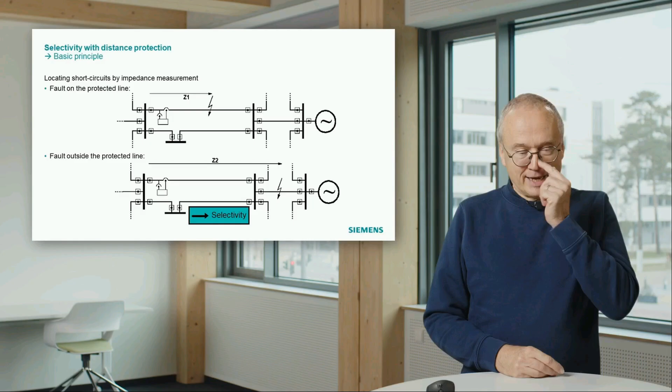This protection relay measures permanently the impedance into the line, and if there is a fault on the line, it measures the impedance of the piece of line from the relay to the fault. That means if it measures this low impedance, it knows there is a fault on the line. If there is a fault on the next line, it will also see this fault, but it will measure an impedance which is a bit higher, and from that comparison of the measured impedance with the impedance of the line, it can decide whether the fault is on the line or not.

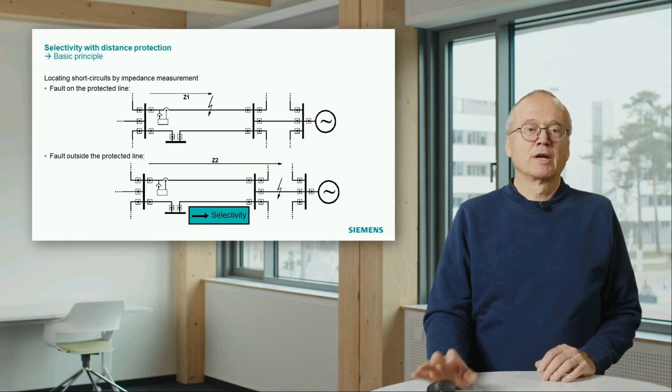That means basically the distance protection principle will lead to selectivity. So from the measurement principle, it is selective, but there is a but, and to understand this but, we have to go a little bit into the details. First of all, I would like to look a little more into this measurement. What does this measurement mean?

As a first approach, I make a very simple replica of the line. I just represent the line by resistance. I know that's not true, but to understand the principle, it's a good way. That means we assume we have a line, and beyond the line we have the rest of a system, which we replace by just an equivalent resistor, in this picture called the load resistor. At the beginning of the line, we measure the voltage and the current and can calculate the impedance. In normal operation, if we measure the voltage and the current and divide the voltage by the current, we measure a pretty high resistance of the line plus the load resistance, which is an equivalent for the rest of the system behind that. It's a pretty high value.

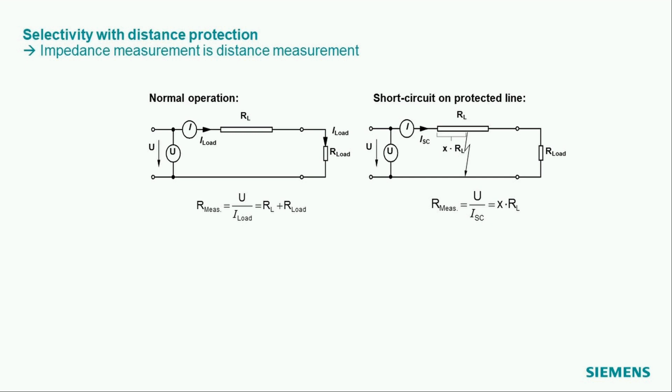If now we have a short circuit on the line, it looks like this. That means we make a short circuit from somewhere on the line to ground. Then we measure a reduced voltage, a high short circuit current, and the result, voltage divided by current, is a percentage X of the line resistance.

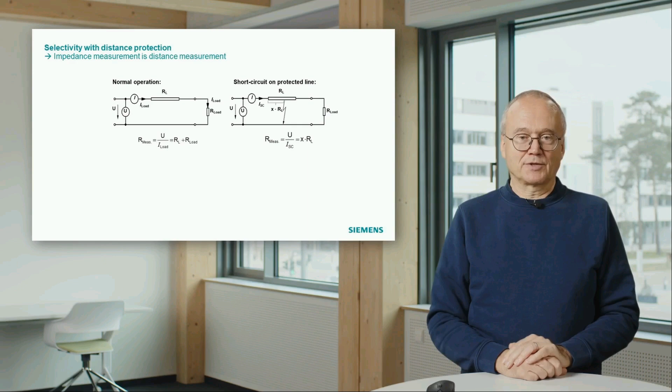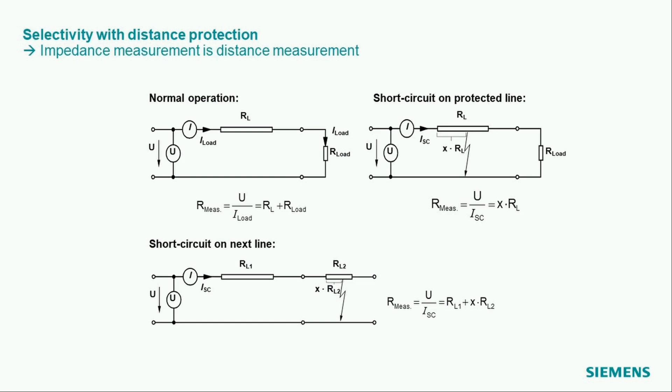And if we have a fault on the next line, a short circuit on the next line, it looks like this. We have a circuit where we measure the resistance of our own line, plus part of the resistance of the next line. That means also a low value, but higher than in the first case where we have a fault on the line. That means if we compare the measured resistance with the known resistance of the line, we could make the decision: is the fault on the line or not.

So in reality it's unfortunately a bit more complex. We have a three-phase system, and impedances are always defined in loops. And if we have three phases, we can define in total 6 loops. We can define the impedance between phase 1 to ground, phase 2 to ground, phase 3 to ground. And we can also measure the impedances between the phases: phase 1 to phase 2, phase 2 to phase 3, and phase 3 to phase 1.

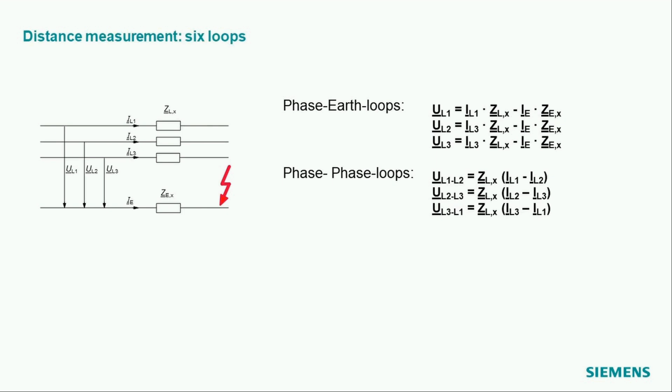That means a normal protection relay has to deal with all these 6 impedances in parallel. That's a bit of workload for the relay, but in most cases we don't have to consider this in the following slides.

Normally modern relays always handle these 6 loops in parallel. You may still have some relays in operation which are called switched relays. In older technologies like electronic relays or electromechanical relays, or also in the early days of digital relays, people were using switched relays, and these relays were only measuring one loop. That means they had to decide in the beginning which loop to measure. But nowadays, you can say all modern relays measure all 6 loops in parallel.

That is one thing we have to take into account. Another thing is we are dealing with AC. That means we cannot talk about resistances. We represent impedances by complex values. That means an impedance consists of a resistive part and a reactive part, and we show that in a diagram where the resistive part is the horizontal axis and the reactive part is the vertical axis. That means the impedance of a line can be represented in this form as this red arrow, just indicating that it has the line resistance RL and the line reactance XL.

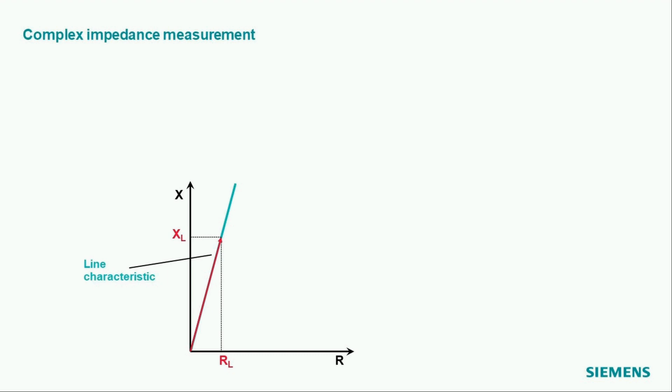And this direction where the arrow is, is on the so-called line characteristic. The angle of this line characteristic is, for overhead lines, in this area as shown in the diagram. You can say 80 degrees, 85 degrees, or for extra high voltage even a bit higher. For cables it's a bit more flat. That means there the resistive part is higher.

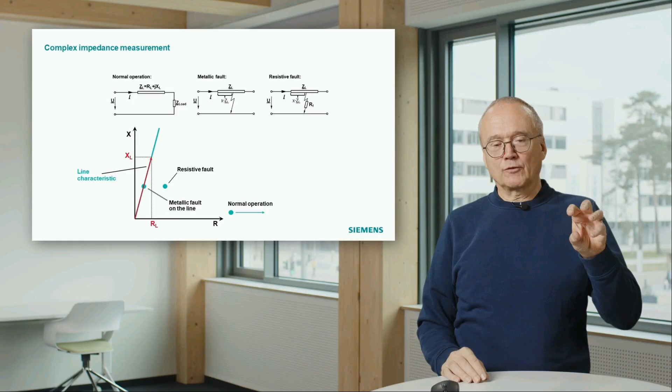And if you have a fault with a fault resistance, that is a thing which also can happen. If you have a phase to ground fault somewhere on the tower, we have a lightning arc with a fault resistance, we have a tower resistance, then you move out to the right. That means fault without fault resistance is on a certain location on the red arrow. If you have fault resistance, you move to the right, the bigger the fault resistance is.

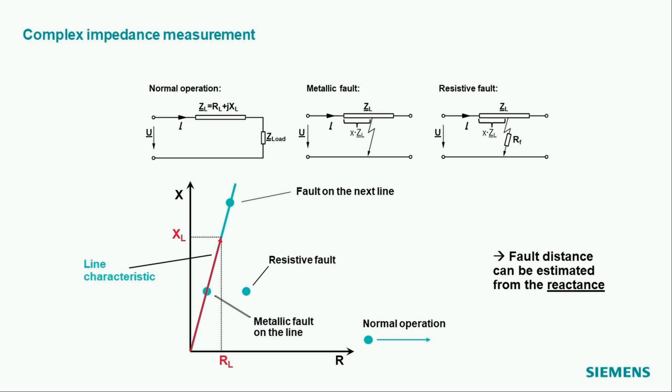And if you have a fault on the next line, you are somewhere there. That means as a result of this discussion, we don't want to draw nice diagrams. What we want to do is make the decision: is the fault on our line or not?

And what can we take? We see the resistive part of the measured impedance is influenced by the fault resistance, and it can be anything - zero, or a high fault resistance. But the reactance is not influenced. That means we can take the measured reactance to the fault as a criterion for whether the fault is on our line or not. The fault distance can be estimated from the measured reactance. We measure the complex impedance, split it into resistive and reactive parts, and use the reactance as a criterion for where the fault is. We compare that with the reactance of the line, and if it is lower than the reactance of the line, we know the fault is on the line.

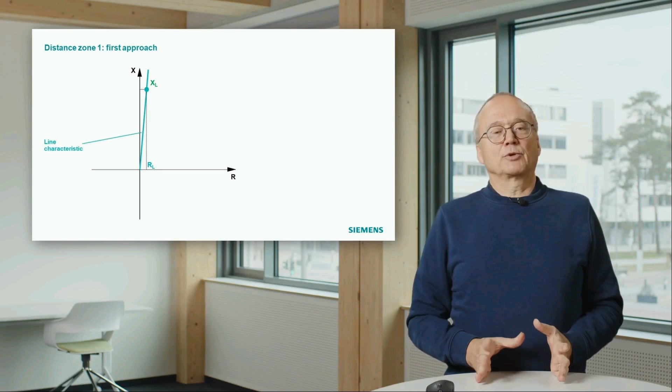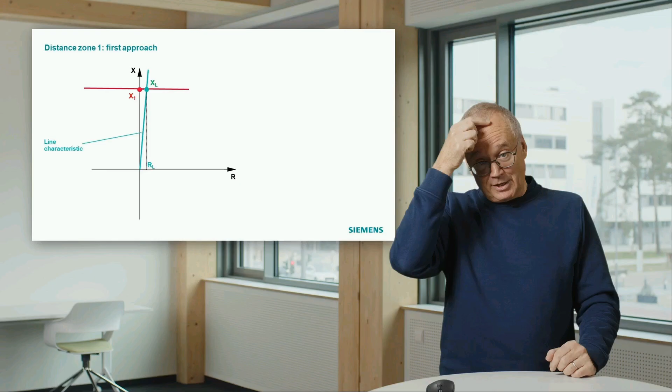And that is the idea of the first zone of a distance protection relay. We take this complex plane and define a certain area in it, and if we detect a fault in this area, we say the fault is on the line. In the first step, the upper limit is the line reactance. That means if we want to set a distance relay, we ask our network planning people what is the total reactance of our line, and that is our horizontal limit.

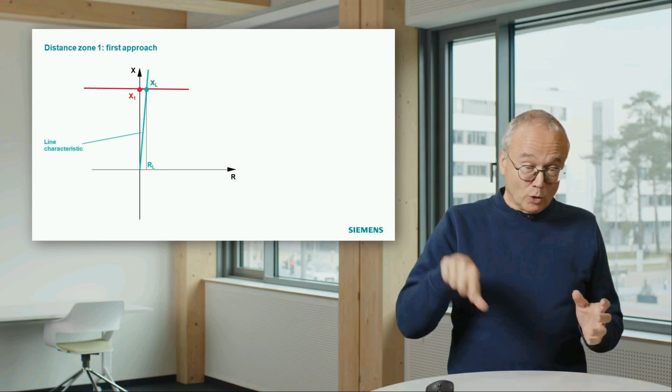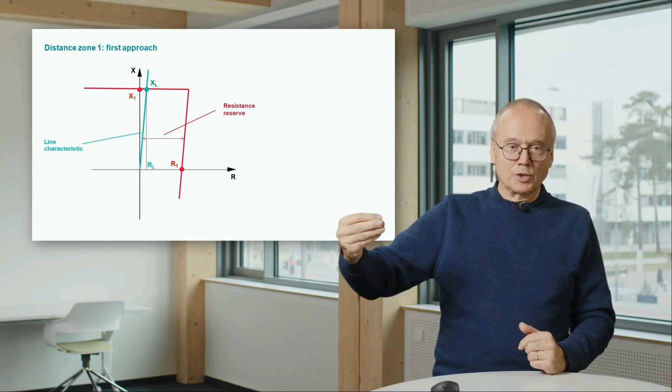Then, in order to have a complete area, we must also define a limitation on the right side. That is a bit tricky, because we must decide what amount of fault resistance we want to catch. If we make this pretty narrow, with a significant fault resistance we would measure something outside the zone and not trip. If we make it very big, we risk that with increasing load flow we move into the diagram. We must be careful that the right side doesn't go too far - otherwise we'd be very sensitive and able to catch high resistive faults, but in a strong load situation the measured point would move in and we would trip on load, which is not good. This resistance reserve setting is always a discussion, and we'll talk more about that at the end of this video.

Then to make this area complete, normally we would limit it to the first quadrant, though for some reasons it's normally widened up a bit. The first zone looks like this - our setting. We make a reactive setting of 100% of the line reactance, and the resistive setting is calculated from the expected fault resistance. If we measure an impedance inside this characteristic, we would trip.

So the question is, will that work? It looks nice and selective - as soon as the short circuit is a little bit beyond this XL on the next line, it will not trip. The question is, does that work? And you can imagine if I ask the question like that, the answer is no, it does not work.

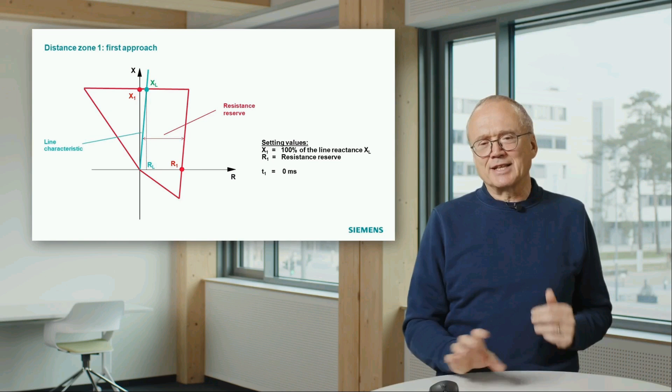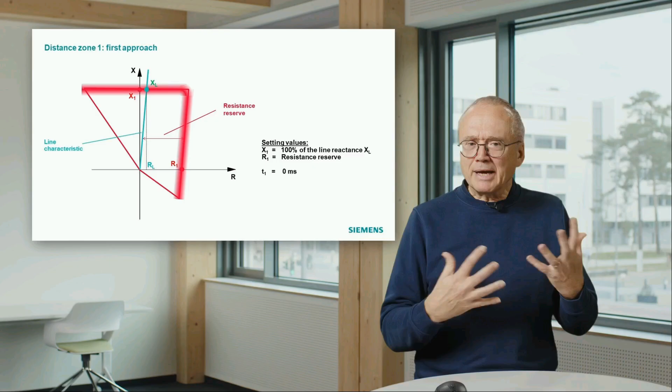And the result of this discussion is that this horizontal line is not really a sharp line - it looks more or less like this. Depending on the direction of the measurement error, it can be a bit higher or a bit lower, and the same applies to the right limitation.

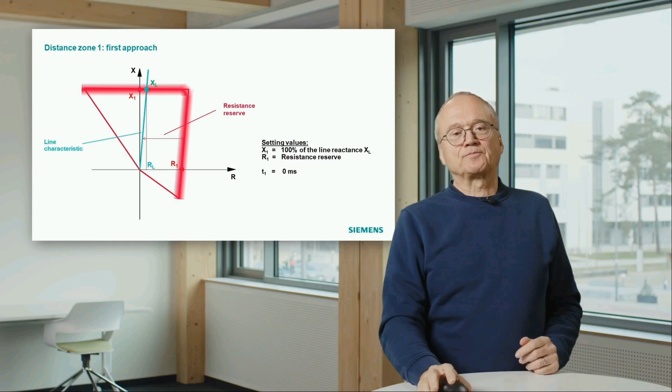And what is the result of that? If you have a fault just beyond your line, at the beginning of the next line, it can be seen inside the characteristic with our setting because of these measurement errors. Or the result can also be, if you have a fault just on the line but pretty near the end, the relay measurement says it's outside - I don't see it in the zone. That is a principal problem in distance protection, that you have to live with this unsharp limitation, and one thing which bothers people most in this context is that you may cause wrong trips.

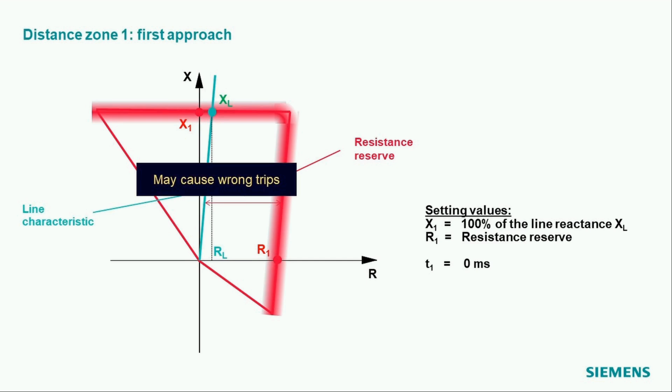Because a short circuit on the very beginning of the next line may be seen inside the zone with these settings, that means this approach of making the horizontal limit to 100% of the line reactance doesn't work. It may lead to wrong trips, and that is why it is normally not used.

So what can you do as an alternative? We start with the same thing. We have here our line characteristic, consisting of the reactive part XL and the resistive part RL. And now we make our limit a bit deeper, a bit lower, to avoid these wrong trips.

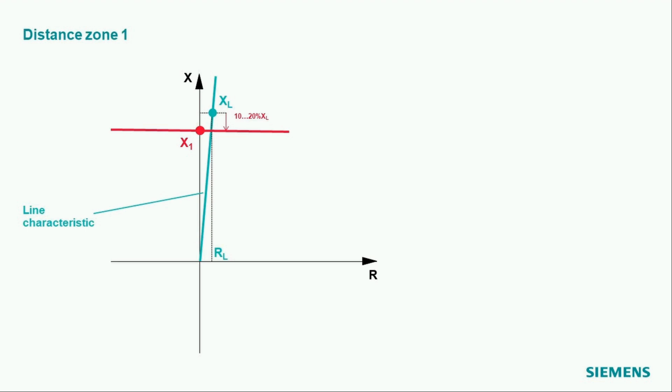What you typically do to cover possible measurement errors is making it some 10 to 20% lower. That means you make a setting of this horizontal limit not to 100% of the line reactance, but for instance to 85% of the line reactance.

Then the same story, right limitation for the fault resistance, and to make this area complete also that limitation. That means we have a setting that the X value is 80 to 90% of the line reactance. And that is a standard value which is normally applied in distance protection.

That avoids wrong tripping with faults on the next line, even with measurement errors. But of course it has a disadvantage. The disadvantage is, you can imagine here, at the end of the line, if we say okay, we have no measurement errors, at the end of the line you have a certain part of the line where a short circuit will not be seen in the first zone. But at least you avoid wrong trips, and that is the important thing.

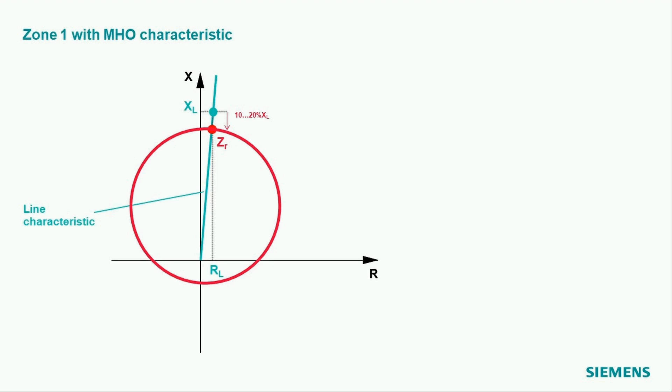And for that reason, we also have the option, instead of using this polygonal characteristic, to use so-called MHO characteristic. The idea behind that is the same. You have this circular characteristic. The setting principle is also the same.

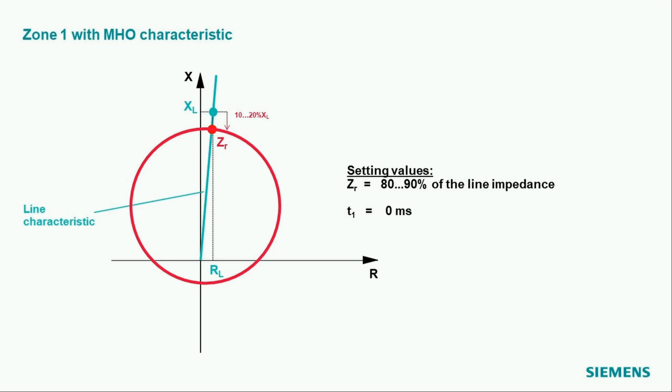That means this circle is also a bit an unsharp thing due to measurement errors, because you have to deal with the same measurement errors. And that means you also have to do this reduced setting of 80 or 85%, and you make then a timer setting. That means all the other ideas I would like to discuss later on are also applicable if we have this type of characteristic.

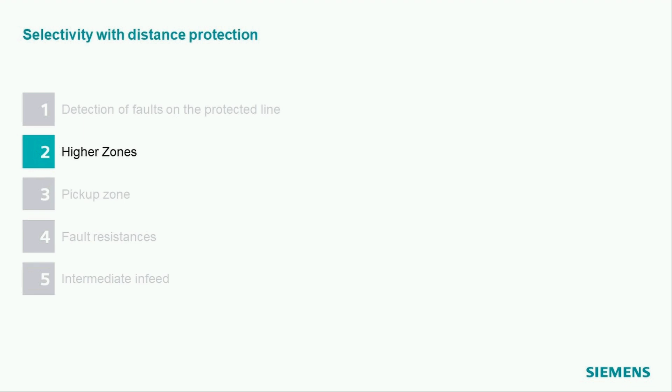Now let's look into higher zones. Up to now we discussed zone 1. Zone 1 reacts on most faults of the line, but we must have in mind there is a certain part at the end of the line which are not seen in the first zone, depending on the measurement errors. And that's one reason why we have higher zones.

And if you look into a manual of a distance relay, you will see many zones. So you might ask your question, why do distance relays have more zones? One possible answer would be to react on faults at the end of the protected line. That is a thing I already discussed. Another option: it could be a backup for the next line. The reason could be we want to confuse the protection engineer.

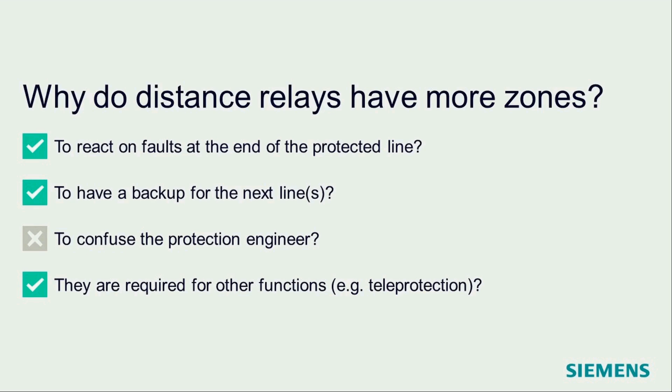Or a last thing, these things are required for other functions like teleprotection, auto reclose, and whatever. And you can imagine I have 4 options here. 3 of them are valid and 1 is not valid, but I also would like to say a few words on that. We will discuss a bit more in detail how to use higher zones to react on faults at the end of the line. We will also discuss the backup situation.

But what about: are they used to confuse the protection engineer? Some people sometimes have the impression, and I had many discussions on the number of parameters and setting values and functions we have in the protection relays. Yes, protection relays, or the distance protection function, is a complicated function. Just based on the principle, you need a lot of parameters to do that properly.

And then you have worldwide a lot of flavors and different special applications which sometimes need an additional timer here, an additional corner in the characteristic there. And that makes the thing complicated, and all protection manufacturers have to make up their mind how can you deal with the amount of parameters. And additionally, we must also have in mind we have a lot of integrated functions in a modern protection relay, and that makes it complicated. And of course, we had to think a lot about that. We had a lot of discussions about how can we make it easier for the user.

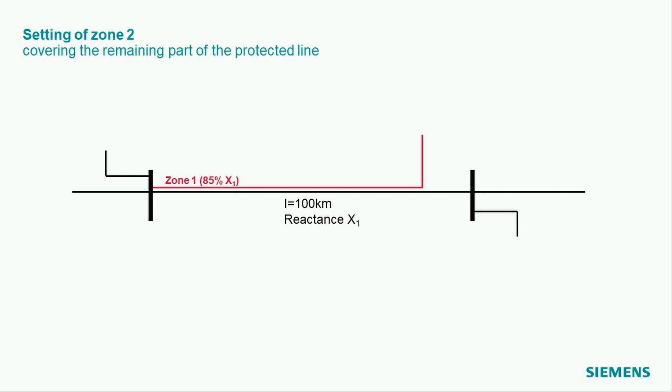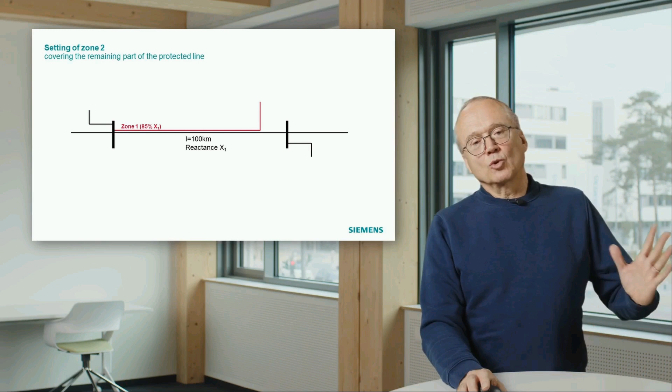Remember, if we forget about measurement errors and assume we have none, the first zone of the left relay would cover 85% of the line. The same applies to the relay on the right side, it would also cover 85%. That means on both sides we have this remaining 15%, exactly 15% if we have no measurement errors. It can be more or less than that.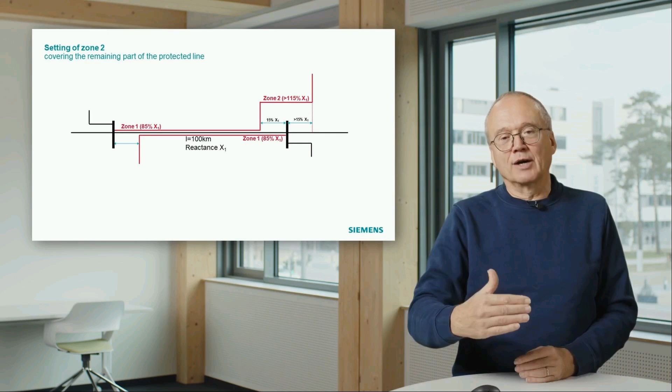So what we can do is compensate for this problem. We add a zone 2, which is just a second zone that looks a bit wider into the line. That should be wide enough so that we are sure the remaining 15% are covered, even if we have measurement errors. That means it must be at least 15% beyond the end of the line.

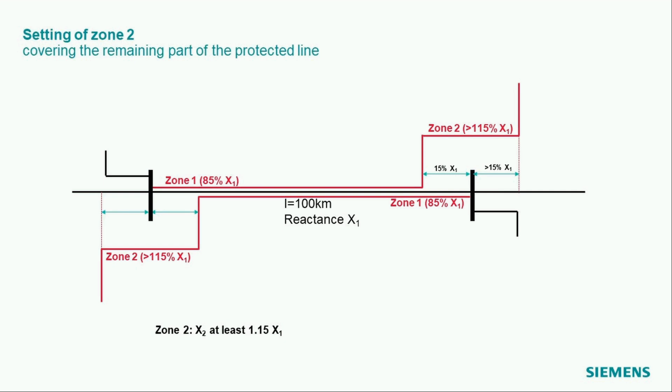If we do that from both sides, if there is a fault in this remaining 15%, it will definitely be tripped also from the left side, unfortunately with a little delay, but it will be tripped. That is one purpose of zone 2: delayed trip. In extra high voltage, delayed trip is not acceptable, so you have to do more things to bring this time down. That is where teleprotection comes in, but that's a different topic. So here we are at least sure we see this fault in zone 2 and will trip on that. That was the purpose, to cover the remaining 15%.

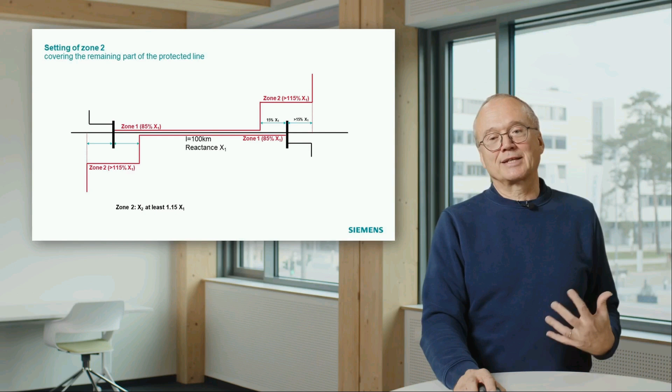But we also have to think about the backup. Remember, we always have to make up our mind: if we have a fault somewhere and the relay which should trip does not trip, what is going to happen? Distance protection has the nice feature that the remote backup is always there, and I can show that in this example.

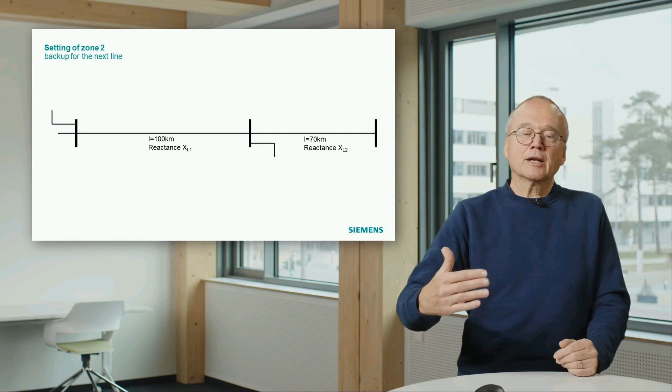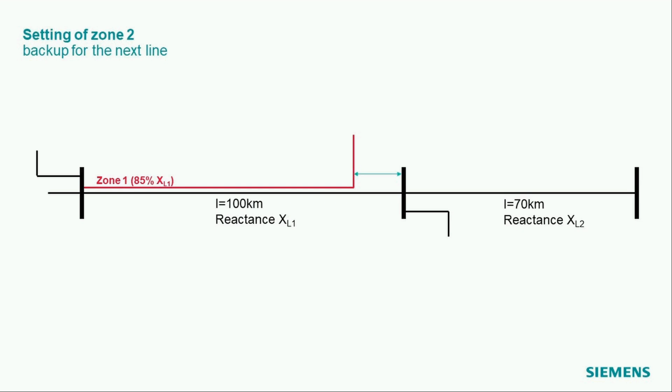We again have our 100 kilometer line, and now I also look into the next line, which is a 70 kilometer line in this case. On the 100 kilometer line, that is the first zone, 85%. The same is also there on the right line, on the 70 kilometer line, also there we make a setting of 85%. Now we look at zone 2.

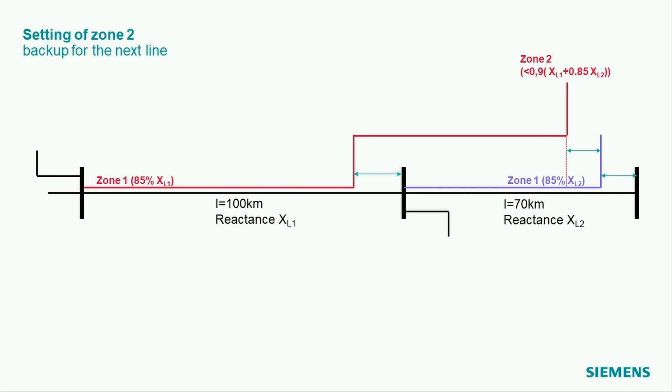If we remember the setting described on the previous slide, it looks a little bit into the following line. That means, with no measurement errors, it would already be a backup for the first 15% of the 70 kilometer line. And at that point you could have the idea: why don't we extend zone 2? Let's make zone 2 longer, then we have backup for a higher part of the line. That is what you normally do with zone 2: make it long enough so that it covers as much as possible of the next line as a backup.

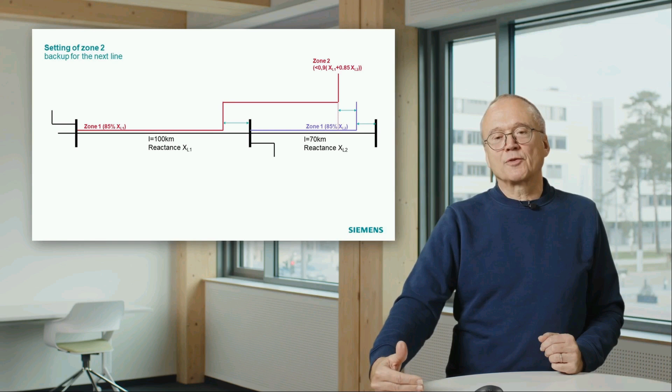Also there you must be careful. You must keep a certain distance to the end of zone 1 of this line, as indicated on the right hand side, otherwise you will get conflicts with selectivity. But at least with that you can do a backup of a significant percentage of that line.

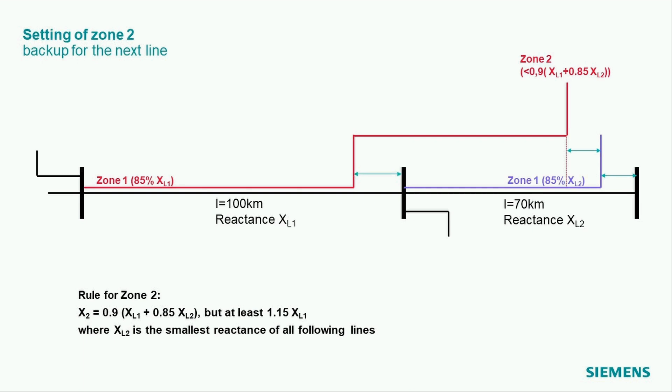That means the rule for zone 2 is, as indicated here: at least 15% higher than the reactance of the line, and it must keep a certain distance from the end of zone 1 of the next line. The problem, which is not visible in this slide unfortunately, is that in a meshed system you often have not only one next line, there can be several lines there.

And there you have to take the next line with the smallest impedance or reactance. You can imagine, if you want to do that calculation for a bigger system, doing that by hand is a bit tricky.

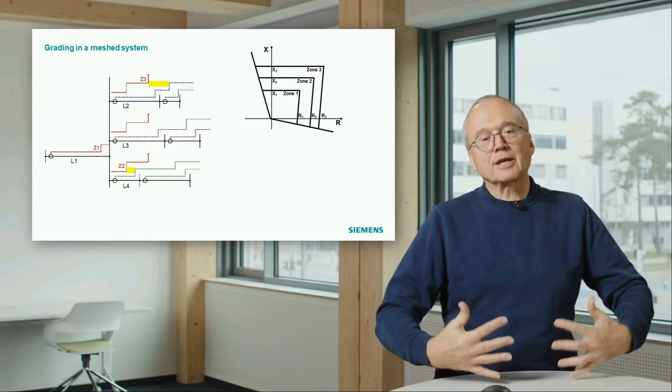This can be continued not only to zone 2, you can also define a zone 3 and whatever you need in your application. There are different numbers of zones in use. So you end up in such a diagram.

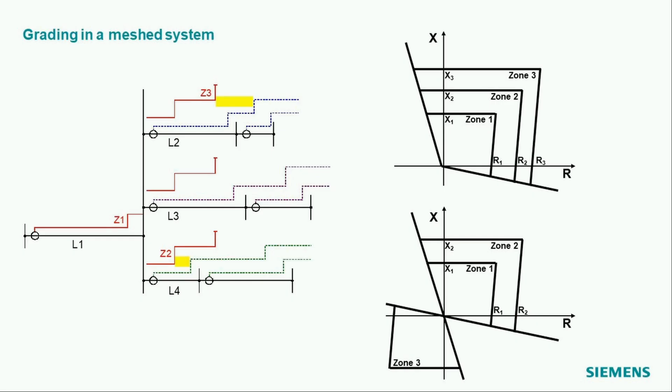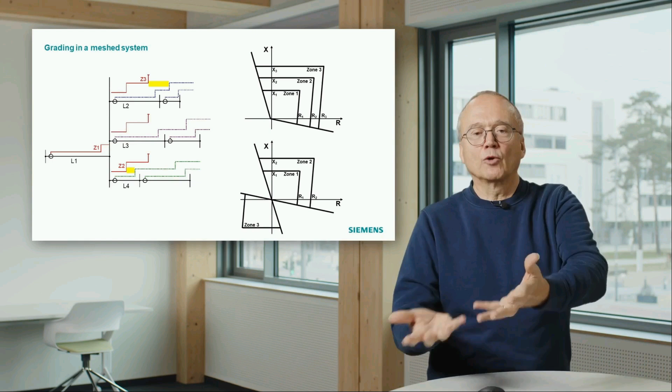Sometimes you also have applications where, for any special reason, you want to look a little bit reverse. Instead of looking only forward into your line, you make one zone which looks reverse. That is typically also a backup application. So in addition to the zone size, you also have a parameter defining whether a zone looks in a forward direction or a reverse direction.

If you look into a manual of a protection relay, you often find in the description a so-called pickup zone. What is that? Actually, the pickup zone is the outer zone, meaning, depending on how many zones you have, it's the biggest zone. In some relays it has a different name; sometimes it's really called pickup zone, but sometimes it's just the outer zone.

This pickup zone requires particular attention, because you must be careful to define its size. This pickup zone defines two things. You should be aware that with heavy load, the measured impedance is approaching your characteristic, and if you are in a critical situation, you suddenly may move into the characteristic and then you will trip.

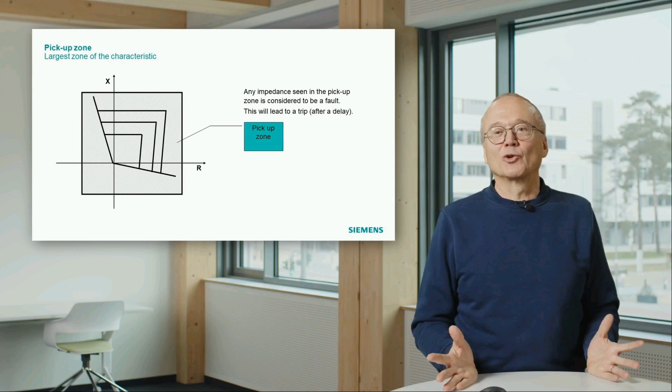You normally have delay times, so all zones have delay times. The pickup zone typically has the highest delay time, so it may have a delay time of a second. But if it moves in a second, the control center is not able to react on that - you will trip. That means if you define your pickup zone, you must be pretty sure that you don't run into the pickup zone in normal operation.

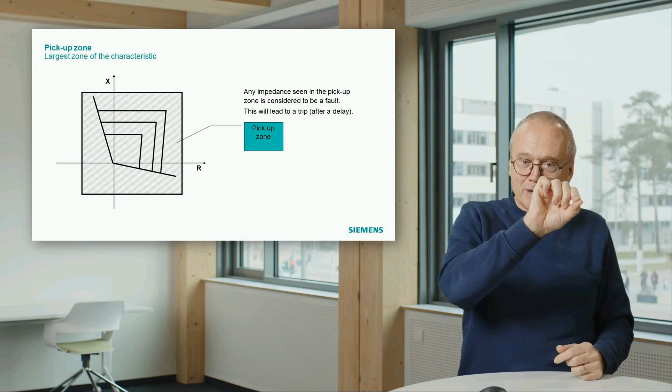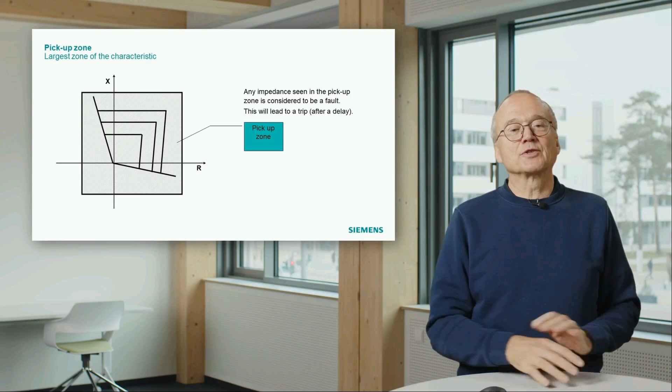That means make it small. The other thing is you can only detect faults inside the pickup zone. If a fault has a fault resistance, remember it moves to the right, in that direction. That means if you make your pickup zone too small, you have the risk that you don't see some faults - you may have resistive faults that you don't see. And that makes the setting of the pickup zone a bit critical.

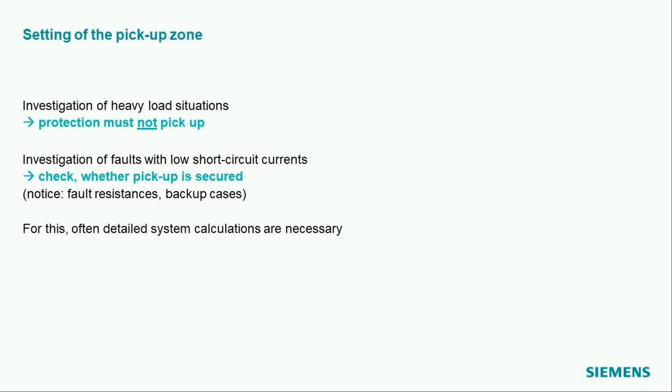You must investigate heavy load situations, and you must make the zone small enough that the protection does not pick up. A critical heavy load situation is, for instance, when you have a heavy load transfer from one area of the system to another, meaning the lines connecting these two parts are heavily loaded. And now you have a thunderstorm and one line has a short circuit - it trips.

In case of a short circuit, we have to trip the line. What's now going to happen? The other lines connecting these two parts of the system have to take over, because one line is shortly out of service due to the trip. That means they are overloaded for a short time. And if at that moment you run by this overload into the characteristic and you trip, you lose even one more line, and then you end up in a cascading outage.

That may end up in a blackout situation. So this is something where you really have to do investigations - you have to find out all critical situations which may occur, not only today but also in future, because you want to define the settings now and they should also be valid in a couple of years. The other thing you have to investigate is faults with low short circuit currents, meaning you have to take into account fault resistances, and you also have to take into account backup cases. There too, detailed calculations are necessary.

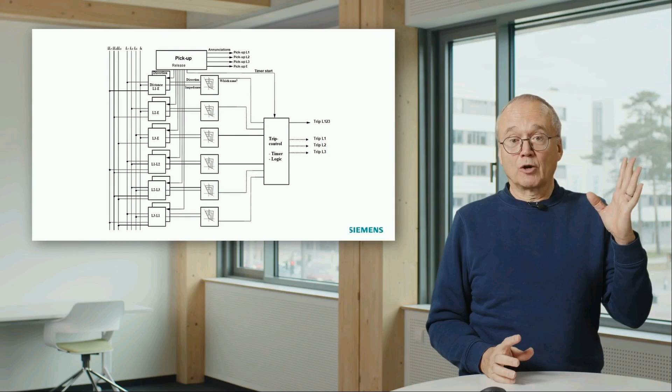And what you also see here is we have 2 different options for a trip. The standard thing is if we trip all 3 poles of a breaker. But remember, in overhead lines we often have auto reclose active, and in auto reclose we have in many applications the concept of single pole auto reclose. That means we don't give a trip command for all 3 poles of the breaker. We see what type of fault we have, phase to ground fault, and then you give a trip

command only to that phase of the breaker. That means protection relays which are able to do single pole auto reclose have, in addition to the 3-pole trip, also single pole trip commands.

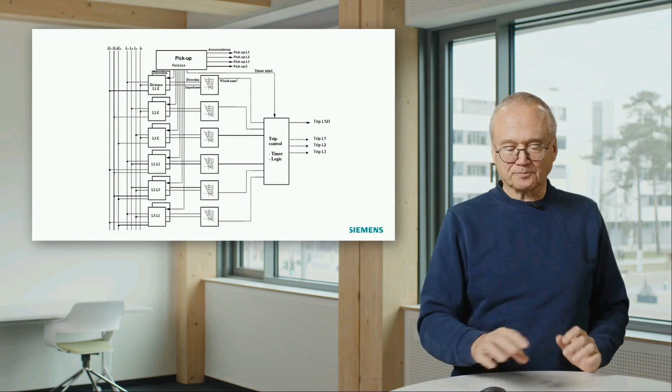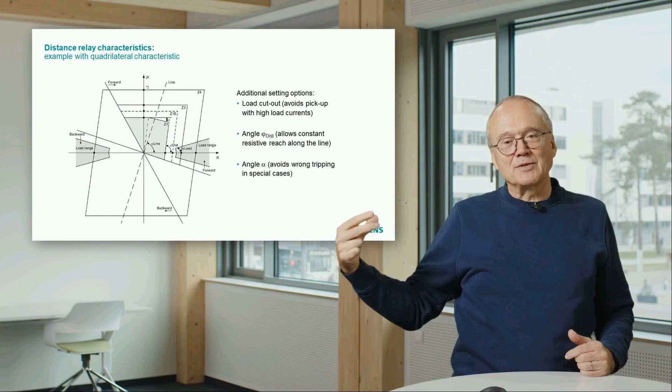And what is also visible here is these load cutouts on both sides, shaded here in gray. These load cutouts have been designed to allow, on one hand, that the load point or the measured impedance can move somehow into the characteristic, can approach the characteristic. That means in that area where the load typically is around the resistive axis, we cut out a little bit of the characteristic. That means if the measured point approaches the characteristic, moves in, but still within this gray area, then we will not pick up.

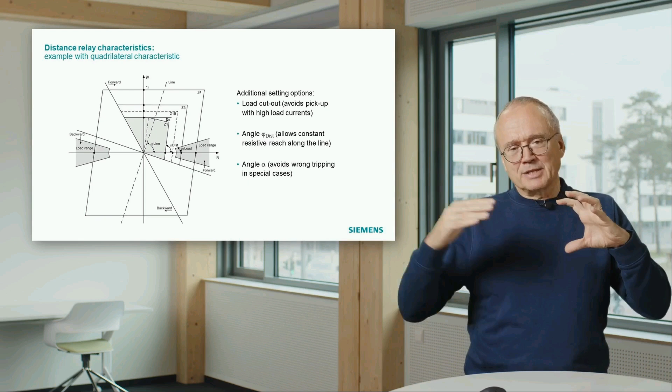That's called load cutout. But on the other hand, if we have a short circuit and we are somewhere in the upper right corner of the relay, we can still react on that. This conflict between shrinking the pickup zone to avoid load problems, and making it big to catch all the faults, can be solved a little bit by making this load cutout. Of course, you have a couple more parameters used to define this load cutout, which are not used in all applications. And the same is also possible for the Mho circle - there we also offer the possibility to make such a load cutout.

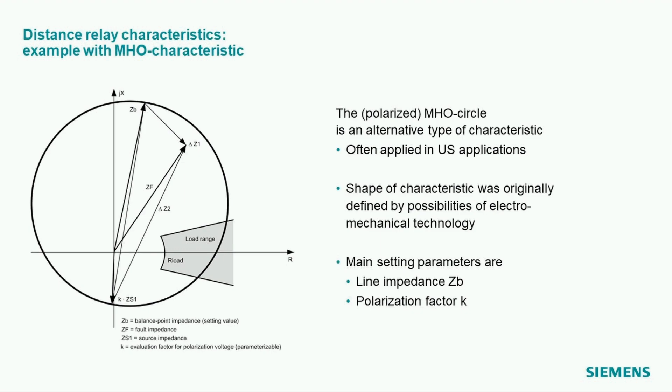So in the final part I would like to talk a bit about fault resistances, because dealing with fault resistance is unfortunately a topic you are often facing if you deal with distance protection. Because if you do the zone settings, you have to think about fault resistances, and for that reason it makes sense to look at that a little bit more in detail.

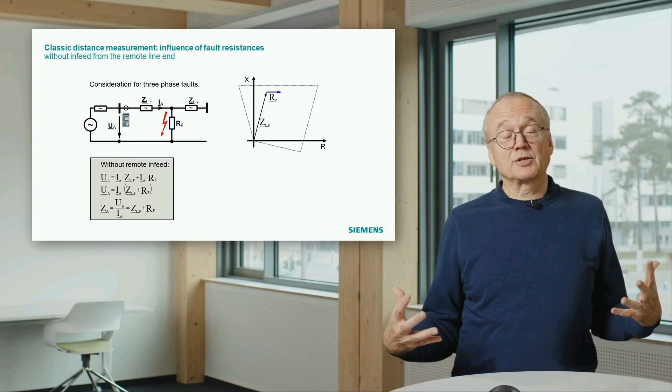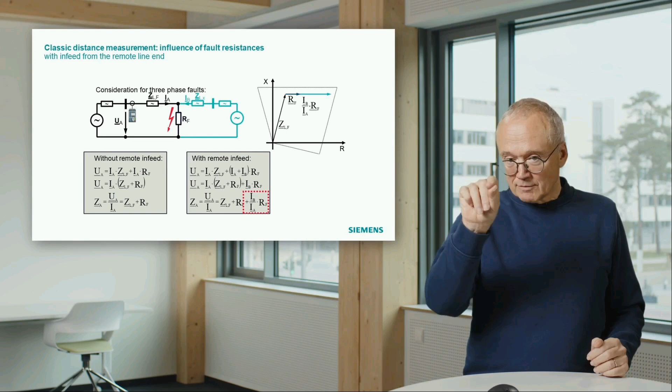And that is how a normal distance algorithm reacts. That means if we are in a meshed system where current comes from both sides, and we measure - for instance a setting of 20 ohms, and we have a fault resistance of 10 ohms - we can even, based on this effect, move out of the characteristic. That is a thing which has to be taken into account in the settings. If you look into the setting recommendations in our manuals, you will find a strange formula where you need the current from the other side. That is the reason behind that.

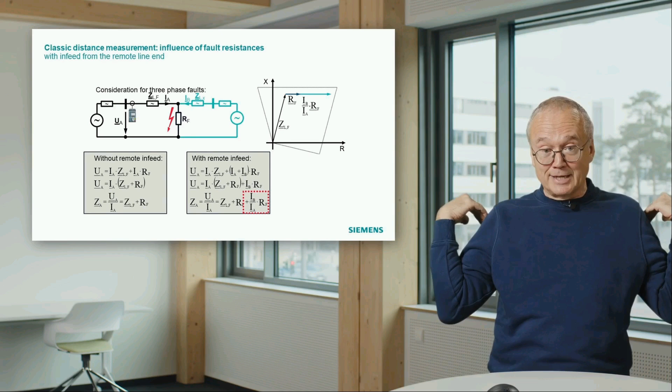And what you can also see from this simple calculation is what is the worst case. The worst case is if this ratio IB over IA becomes pretty high, and that is a situation where the majority of the short circuit current comes from the other side. That means if our left protection relay has a weak infeed behind it and you have a strong infeed on the other side, then this ratio becomes pretty high, and then you may move out of the characteristic.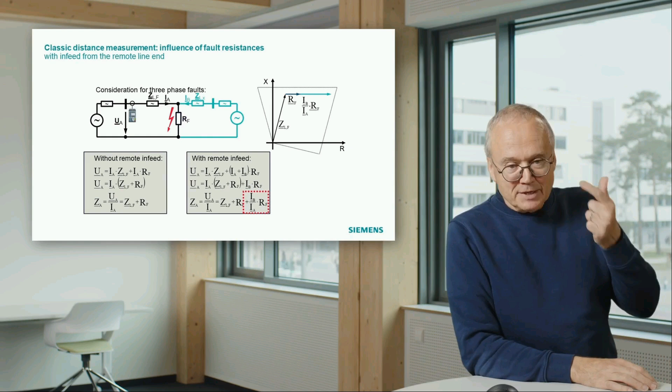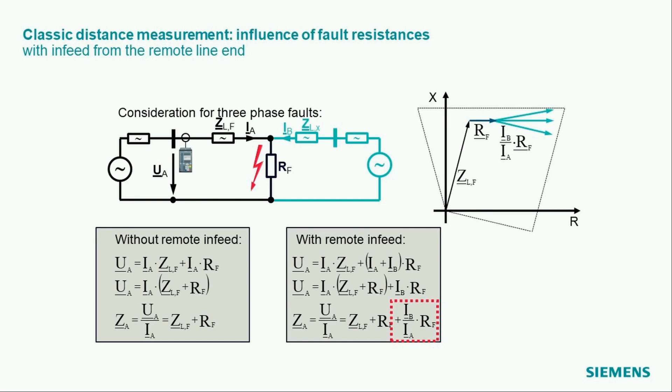And that's only one part of the story - it goes even further. These quantities here are complex quantities, meaning the ratio can become complex if the phase angles of the currents from both sides are different. If this ratio becomes complex, you do not only have to add a horizontal error, it can turn the whole thing a little bit. That means if you are close to the limit, you can even go up here and leave the characteristic over there. So for that reason, that has to be taken into account, and we can discuss this a little bit more using my simulation.

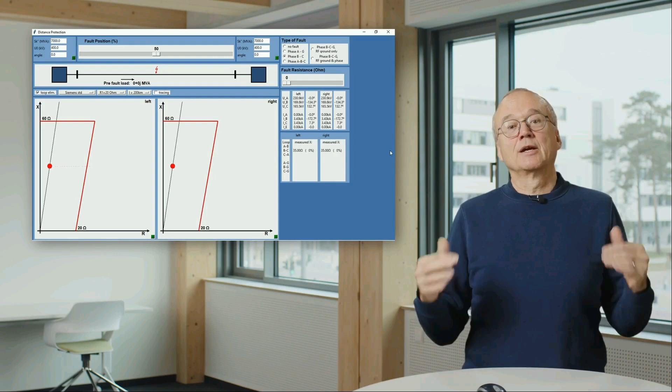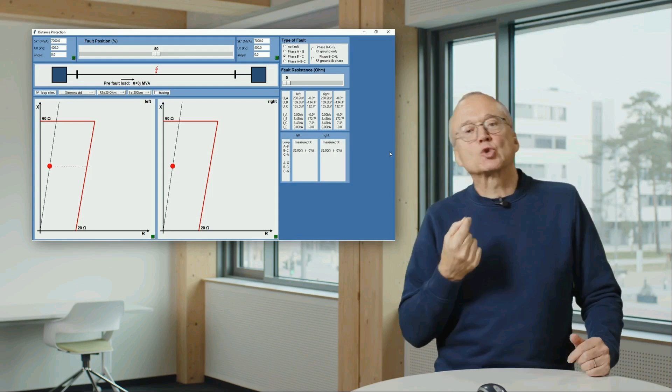We have the same short circuit current from both sides. That means this ratio IB over IA I showed on my slides is 1. And that means the impedance we measure is the impedance of the piece of line, 50% of the line, plus fault resistance, plus IB over IA multiplied by fault resistance, which is 1. That means we measure 2 times the fault resistance. And we can see that here as a result.

We move now much faster to the end. That means already with 10 ohms, we are now reaching the limit. We have a setting of 20 ohms and we are approaching the limit already with 10 ohms due to the short circuit current coming from the other side.

But, and that is the good thing, we still move horizontally. You can show that a little bit better by activating this tracing. So you see here, with increasing fault resistance, the reactance measurement is not influenced. That means we just have to look at the reactance limit.

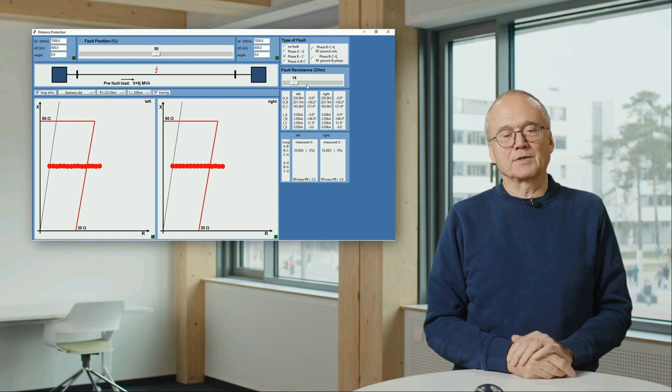We must be aware that in this setting and at this location we can only detect faults up to a fault resistance of 10 ohms in the first zone. A fault with a higher fault resistance would probably be seen in a higher zone.

Okay, now we can make the fault closer to the limit. Maybe we have a fault here. Now doing the same thing, we see we move still horizontally, but what we see now is, let's say we take 10 ohms: the left relay is already outside the characteristic, whereas the right relay is still inside the characteristic.

Why is this? This is because, remember, what we measure is the impedance of the part of line plus fault resistance plus IB divided by IA multiplied with the fault resistance. If we have a fault at that point, for the left relay, the current it sees is lower than from the other side. The fault is very close to the right side, so the majority of the fault current comes from the right side. Only a smaller part comes from the left side. That means the ratio IB over IA becomes much bigger than 1. And that is why the measurement of the left relay moves faster to the right than the measurement of the relay on the right side.

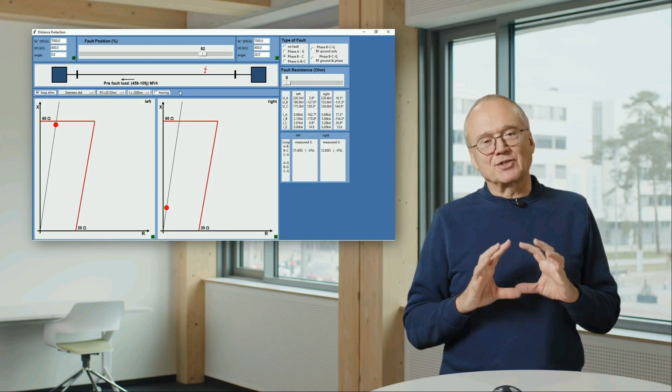Unfortunately, you have to set again a few parameters. Sorry for that, but the algorithm requires that. And I can also show in the simulation what happens. I called it here reactance method. In the manuals you find RMD method. I have now activated this method.

And what you see is if I do that, then although we have pre-fault load flow, the movement is horizontal. That means it really gives a better measurement in case of fault resistances and pre-fault load flow. And for that reason, and because it also has some other advantages, we highly recommend to activate that method in our protection relays. So that was a short look at the simulation.

We will now continue with the slides again. So after this look into the simulation, I would like to do some concluding remarks on the issue of fault resistances. We saw that fault resistances in conjunction with pre-fault load can influence also the reactance measurement.

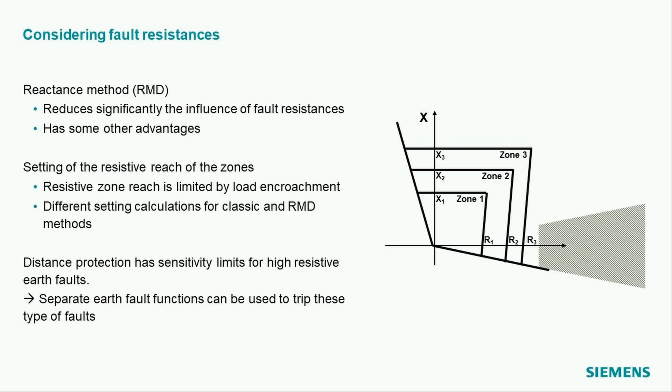That means they would move the measured impedance not only to the right, but also up or down. This can be avoided by activating the reactance method in a distance relay. So it reduces this influence. Theoretically, it cannot reduce it to zero, but for practical applications, it's okay. And besides that, it also has some other advantages.

If we talk about how wide can we set the resistive reach of the zones, you think, yeah, let's set it very wide so we make the relay sensitive. We always have to think about load encroachment. That means we cannot make it as wide as we would like, because we always have to avoid that a load point, that during heavy load situation, a critical network situation where something happened but no short circuit, that we suddenly move into the characteristic and trip. And this load cutout can help us in this context.

And important is that you do proper setting calculations for the resistive reach. And they are sometimes different, especially if you look into single phase to ground fault. They are different for the classical method and the RMD method. So please have a look into our setting examples in the manuals.

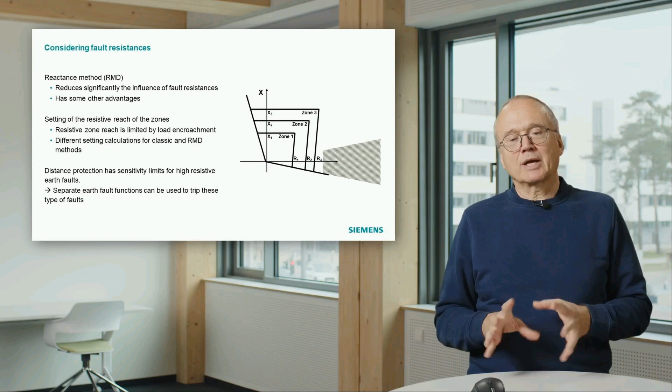But whatever we do there, we have some sensitivity limits. That means we can catch faults up to a certain fault resistance, and everything beyond that is not visible for the distance relay. And if we want to catch high resistive faults, we may have to activate separate earth fault functions which are tuned to detect these faults. Typically they are not so fast because there are no high currents involved in these cases, but you can then tune other principles a bit to detect these type of faults.

And the last thing I would like to mention in the context of sensitivity with distance protection is also an important thing, is the role of intermediate infeed. And intermediate infeed is a thing which is only relevant for the backup case.

That means the case where we measure into the next line, not into our own line, but we want to do the measurement beyond a substation into the next line, which is required normally for the backup case.

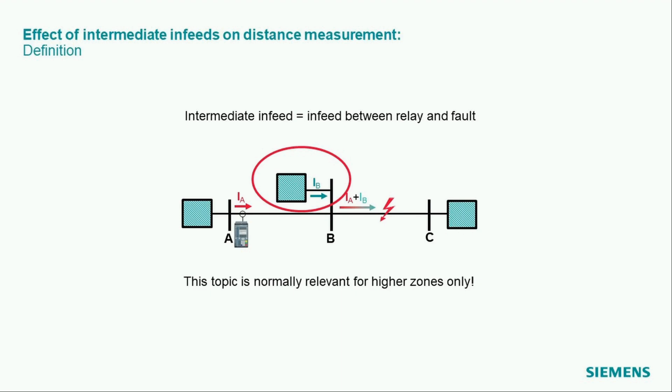If we do that, we typically have the situation illustrated in this drawing. Between the relay and the fault on the next line, we may have an infeed, because some other lines come in there and also have some short circuit current. This infeed is called intermediate infeed, and it disturbs our measurement, because it injects this blue current, which flows through this part of the faulty line to the short circuit. It generates a voltage drop across this line, and this voltage is seen by our relay and influences the measurement.

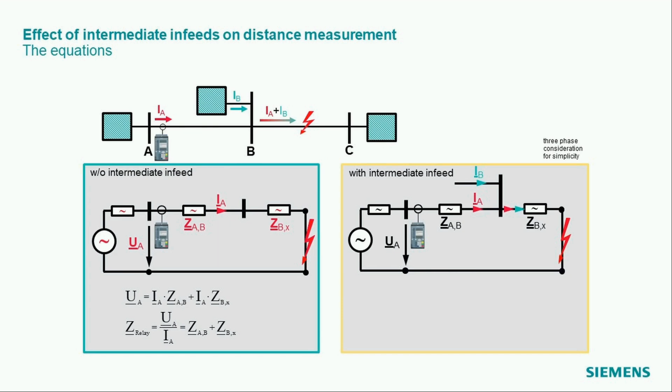You can again set up equations as we did for faults with fault resistance. On the left hand side you see the equivalent diagram for the situation without intermediate infeed. Our relay measures the impedance of its own line plus the impedance of the part of the next line up to the fault. We assume a fault without fault resistance to keep it simple, and then we can calculate from that the impedance of our own line plus the impedance of the next line.

If we do the same thing for the situation with intermediate infeed, the equations change a little bit. If you write down the equations, you again get this red dotted box with a ratio IB over IA. That means you see an additional impedance - the measurement gets a measurement error, a higher value, and the value is IB over IA multiplied by this impedance of the line.

Again, if the intermediate infeed is nearly zero, IB over IA becomes zero, then you can forget it. But the critical case is if the infeed behind you is relatively low, weak infeed, and the intermediate infeed is pretty strong, then IB over IA becomes a high factor, meaning a significant increase of the measured impedance.

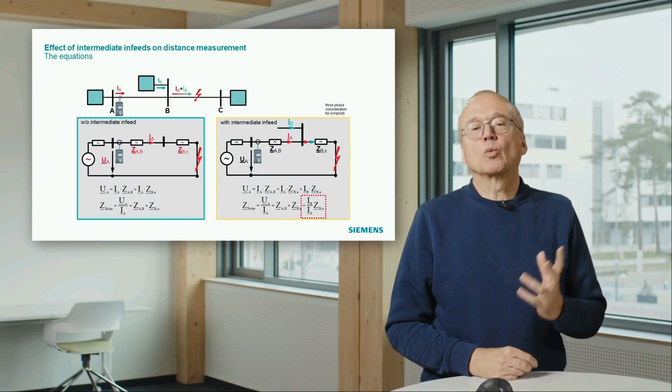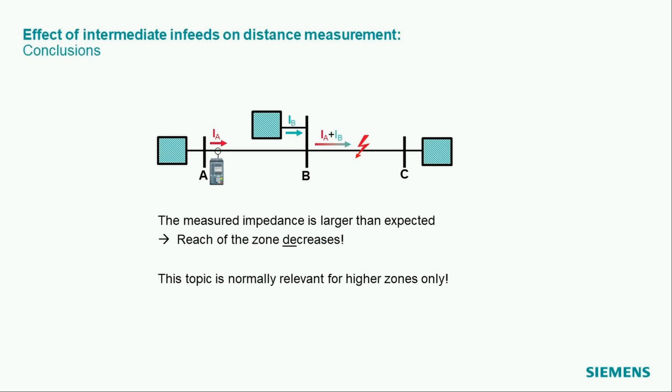Now what does that mean? Imagine you have a setting of zone 2 that looks into your next line as a backup case. Maybe you calculated the setting and found out you cover maybe 70% of the next line in a backup. That's only relevant for backup, because we are dealing with the next line.

Now, due to this intermediate infeed, you measure a higher value. That means if there is really a fault at maybe 65%, with a setting to 70, you would expect it's inside my zone 2. But due to this intermediate effect, the measured impedance is much higher, so it's seen above 70%. The relay says, not in zone 2, I will not trip. That means the measured impedance is greater than it is in reality due to this effect, and that means the reach of the zone decreases.

We no longer cover 70%, but maybe only 60, 50, 40, depending on this ratio. That means you think you have a backup, zone 2 covering a bigger percentage of the next line, but in reality, due to this intermediate effect, it's not the case.

And that is where zone 3 or even the pick-up zone comes in. You have to check that at least the pick-up zone should cover, also with intermediate infeed, the whole next line, because otherwise you would not have a backup situation there. This effect of intermediate infeed has to be considered if you check whether a backup can be secured for every fault location in your system.

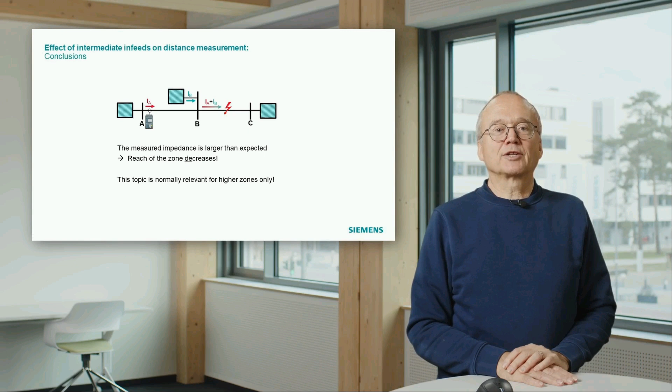And with that we are reaching the end. So that was a look into the sensitivity for distance protection.